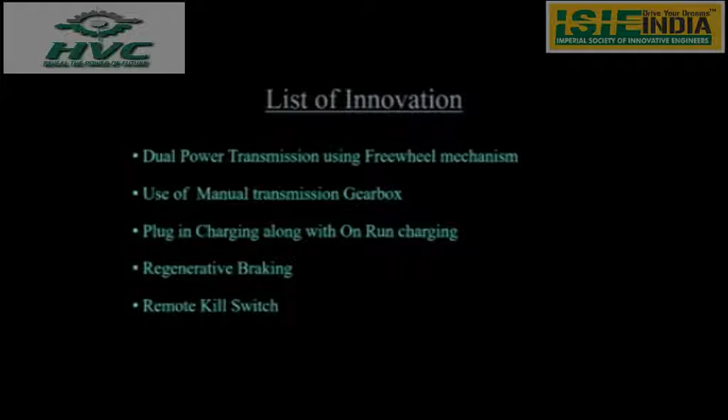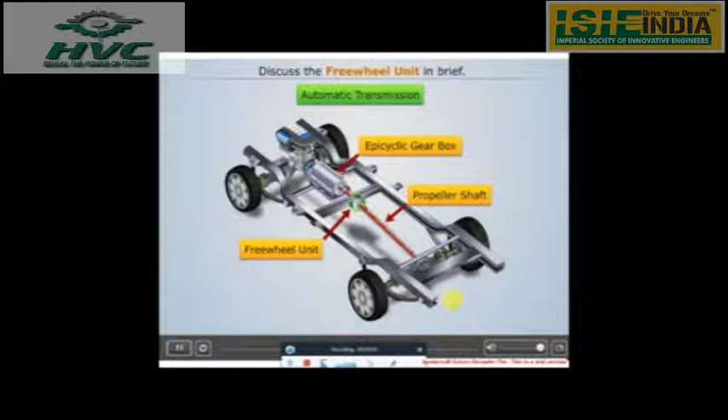In some vehicles, a freewheel unit is provided between the gearbox and the propeller shaft. Let's understand its working and advantages. A typical freewheel unit consists of an inner driving member, which is connected to the gearbox.

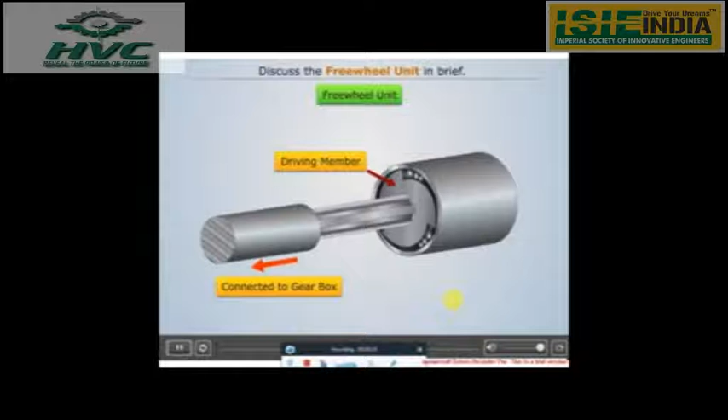The outer driven member is connected to the propeller shaft. The driving member is provided with 3 steps, and in each step, 3 spring-mounted rollers of different sizes are attached.

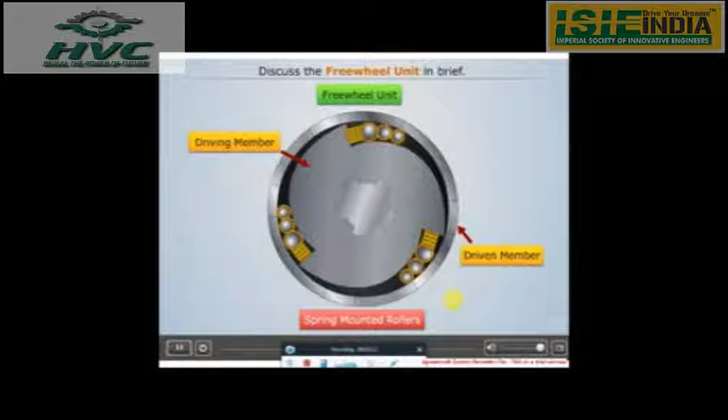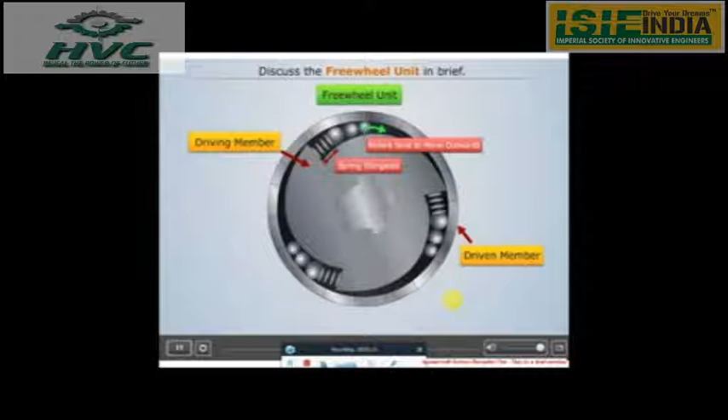When the driving member rotates as shown, the spring elongates and the rollers tend to move outwards. This outward movement of the roller increases the friction between the roller and the driven member. This friction causes the driven member to rotate, and thus the power gets transmitted to the propeller shaft.

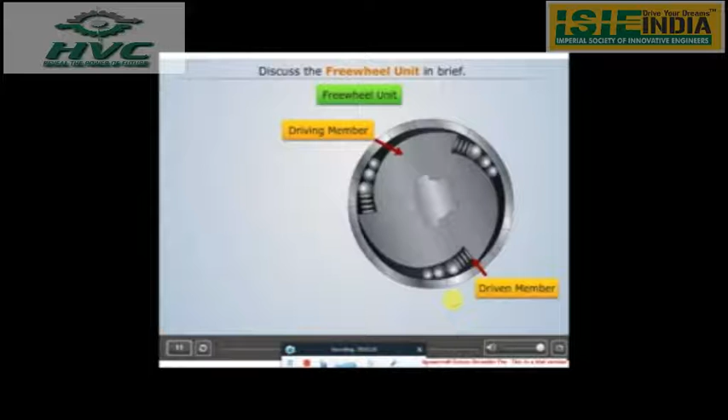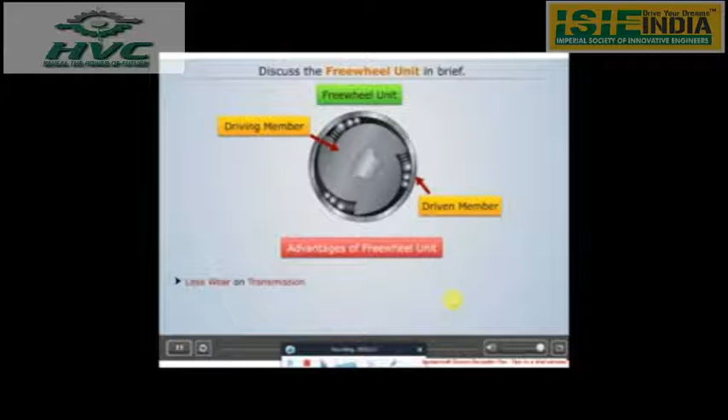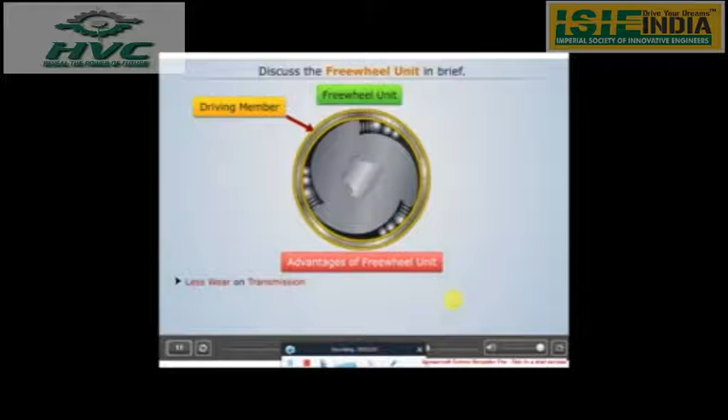The main advantage of the freewheel unit is that it leads to less wear on the transmission while driving down a slope. To understand this, consider a car moving downhill with the clutch engaged. In this case, the outer member becomes the driving member, but this rotating outer member doesn't rotate the inner member with it. Thus, the engine and the transmission get isolated from the driving wheels, which leads to less wear on the transmission.

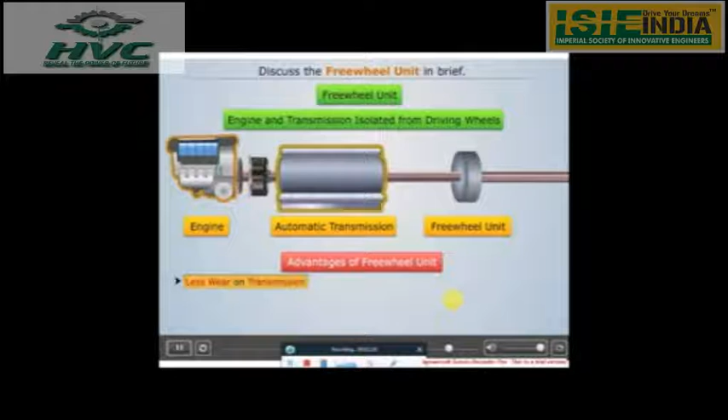Also, the gear need not be brought to neutral. In our vehicle, we used 2 units of freewheel connected in anti-parallel manner. Both freewheel units are connected to a common auxiliary shaft as shown in the figure. Let us describe its working.

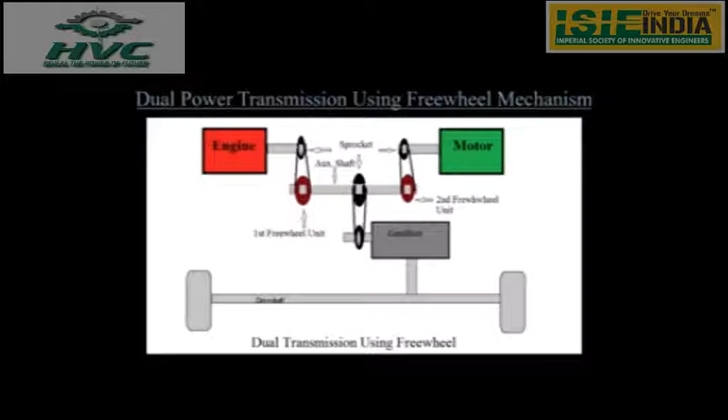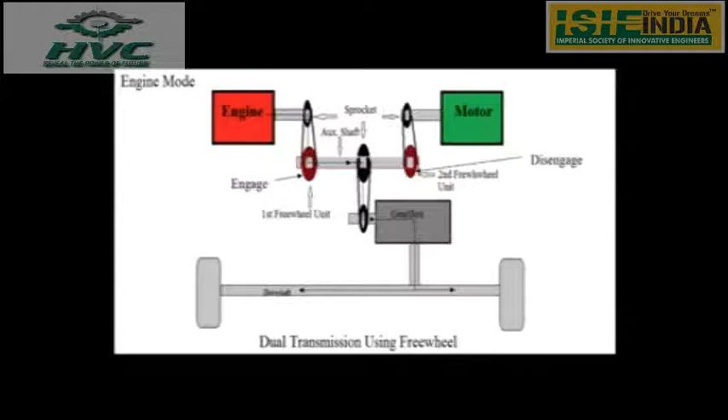In engine mode, when the engine shaft starts rotating, it will rotate the first freewheel unit's upper part, which is connected to the auxiliary shaft. It will then rotate the auxiliary shaft and provide power to the gearbox, which will further transfer to the wheels. In this mode, the second freewheel unit remains disengaged.

In motor mode, when the motor shaft starts rotating, it will rotate the second freewheel unit's upper part, which is connected to the auxiliary shaft. It will then rotate the auxiliary shaft and provide power to the gearbox, which will further transfer to the wheels. In this mode, the first freewheel unit remains disengaged.

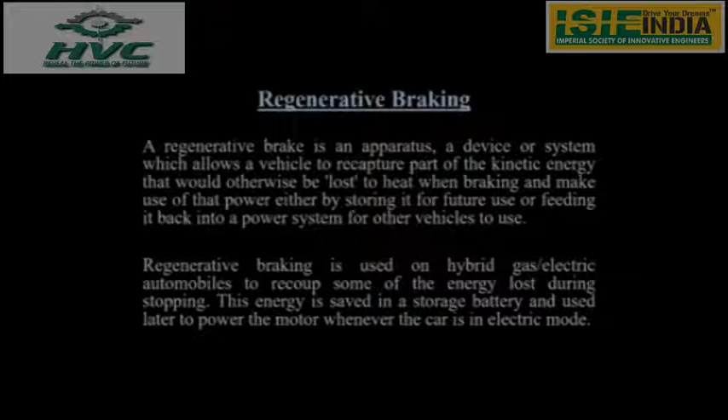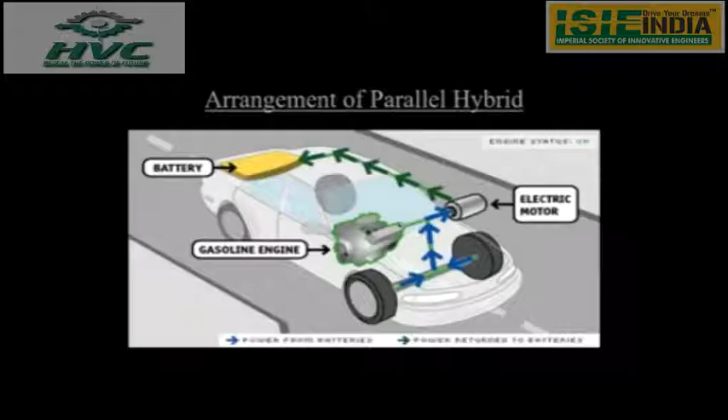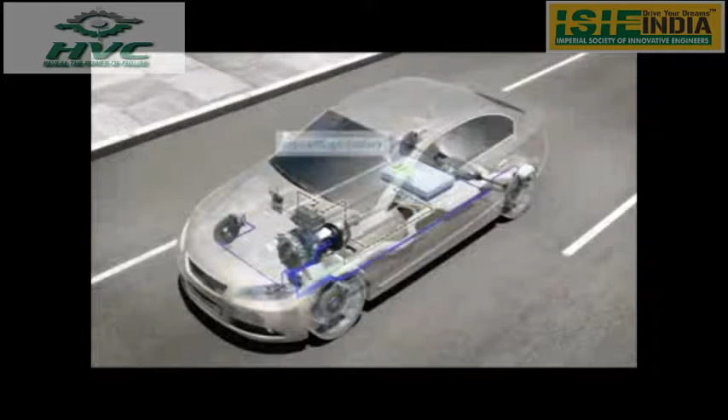When the driver steps on the brake, the vehicle's electric motor switches to generator mode. The wheels transfer kinetic energy via the drivetrain to the generator. Through its rotation, the generator converts a portion of the kinetic energy into electrical energy, which is stored in a high-voltage battery. The generative braking torque of the electric motor, resulting from this energy generation, decelerates the vehicle.

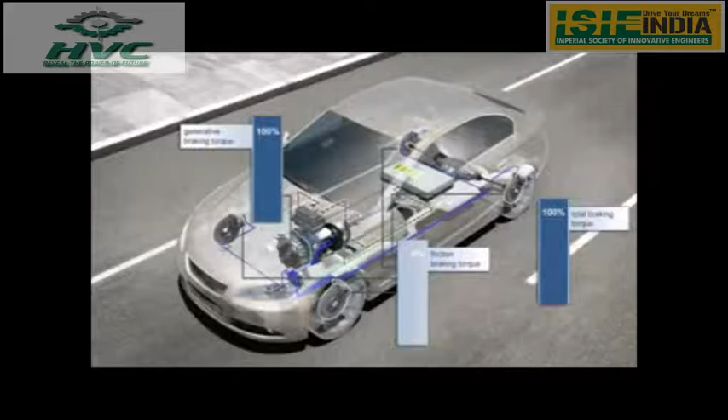At low speeds, for example shortly before the vehicle comes to a stop, the electric motor can no longer supply sufficient generative braking torque, and the friction brake must be activated. To maintain the required deceleration, the braking torque from the friction brake is continuously adapted to the current generative braking torque, a process called torque blending.

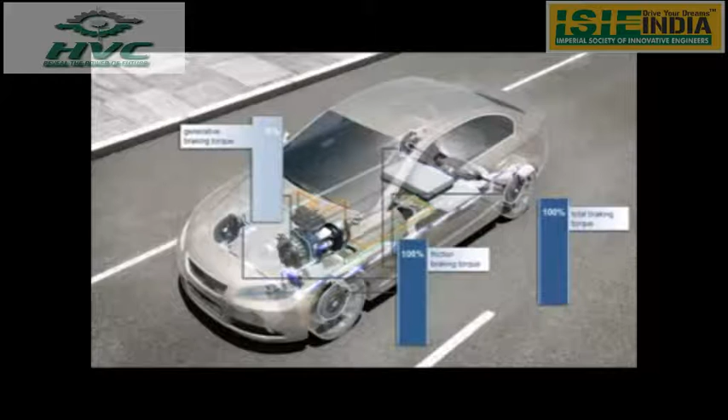In the case of full braking or an unstable driving condition, the vehicle is usually decelerated solely via the friction brake, as wheel-specific interventions are required.

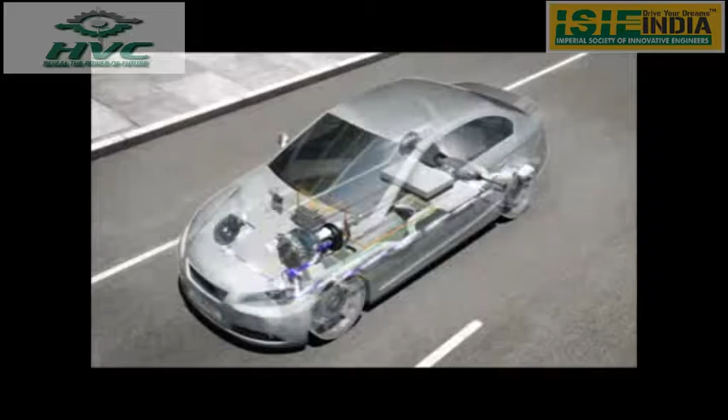Regenerative braking enables an extended range in electric vehicles, as well as lowering fuel consumption and improving CO2 balance in hybrid vehicles.

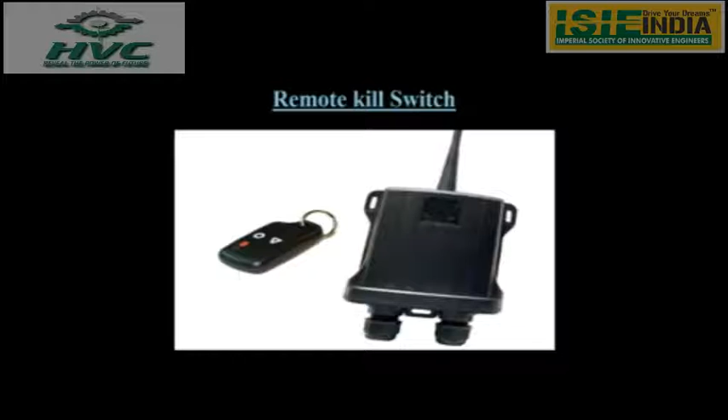With the entire world moving towards wireless technology, this can be used in the automotive world of racing to ensure high-end security to the driver. The wireless trigger of the kill switch would avert any mishap to the driver during an emergency such as loss of control over the vehicle, subsystem failure, or vicinity to an accident.

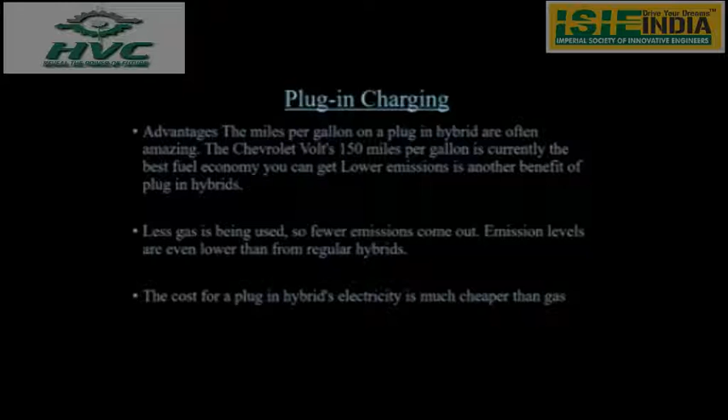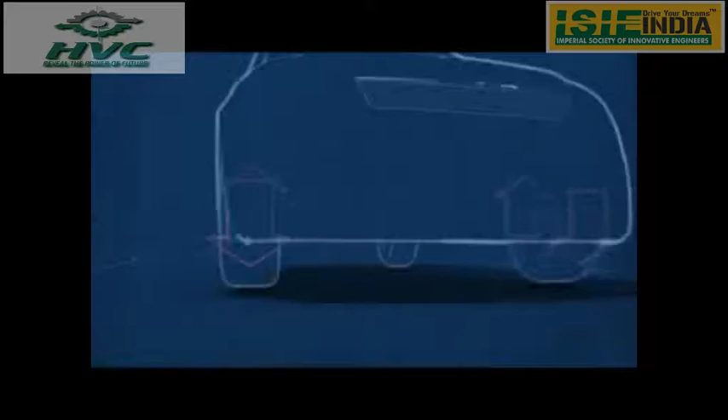Let's talk about plug-in hybrid electric vehicles. These vehicles are relatively new to the roads of Canada, and they are a unique approach by automakers to respond to more stringent greenhouse gas regulations. PHEVs, as they're commonly known, also respond to consumer demands for quieter, cleaner technology when they're behind the wheel.

Quite simply, a plug-in hybrid electric vehicle is essentially a regular hybrid vehicle with a larger battery pack that can be charged by plugging into the grid. The advantage of the plug-in hybrid electric vehicle is that it offers an extended all-electric range capability.

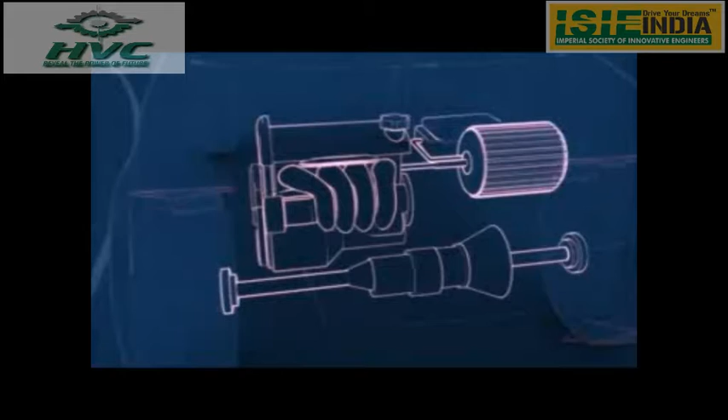Let's get under the hood. There are four main components: first, an internal combustion engine; one or more zero-emission electric motors; and a battery or series of batteries. There are a number of different types and configurations which store and send out electricity, and a transmission that transfers the motor's power to the wheels.

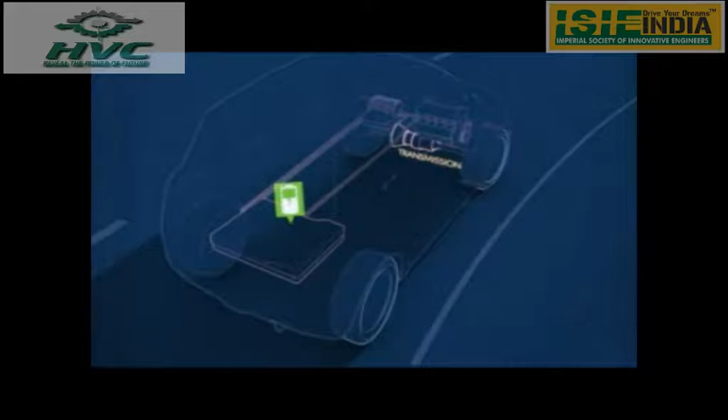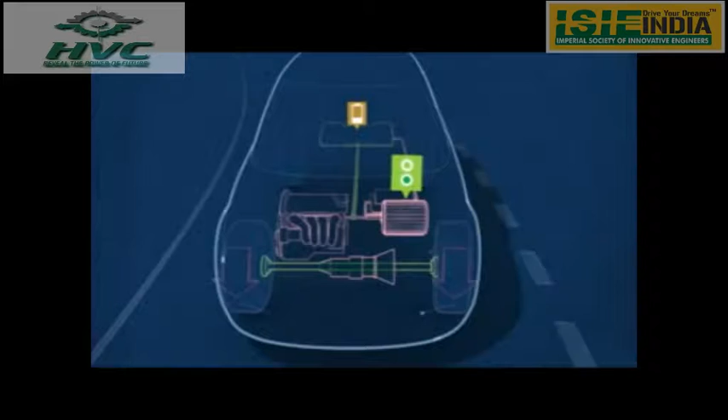While you are driving, a series of computers are constantly monitoring the state of charge of the vehicle's batteries. A plug-in hybrid electric vehicle is designed so that your primary power is electric, so the electric propulsion system is first in line. But when the batteries can no longer provide adequate power, the internal combustion engine is commanded to turn on and take over.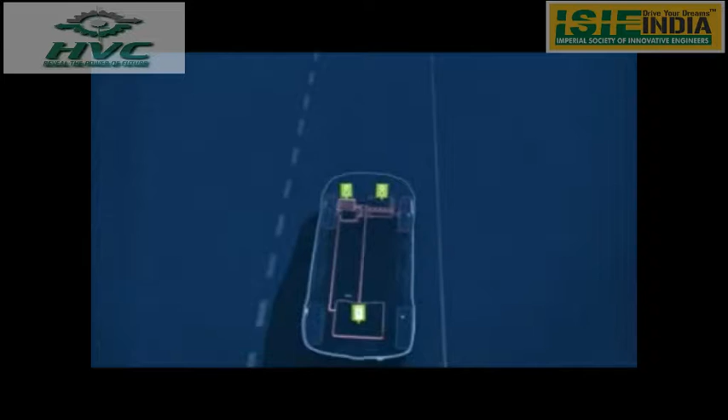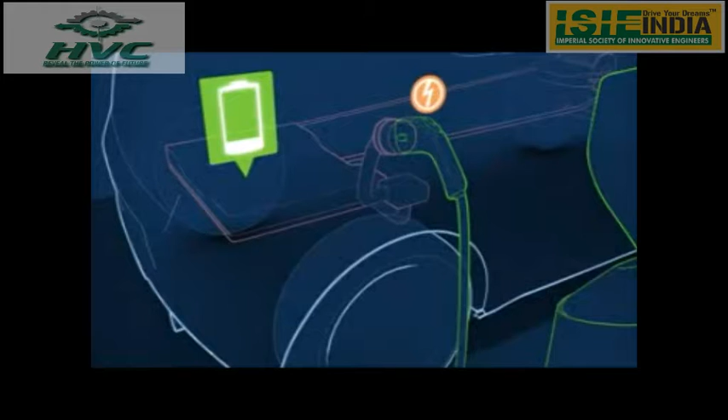For some plug-in hybrid electric vehicles, the internal combustion engine can complement the electric motor when more power is needed. The plug-in hybrid electric vehicle also has a charging coupling, the place you plug into when you are charging the vehicle. That's because the batteries in plug-in hybrid electric vehicles need to be charged in order to ensure that you get the benefit of up to 70 kilometers of electric-only range.

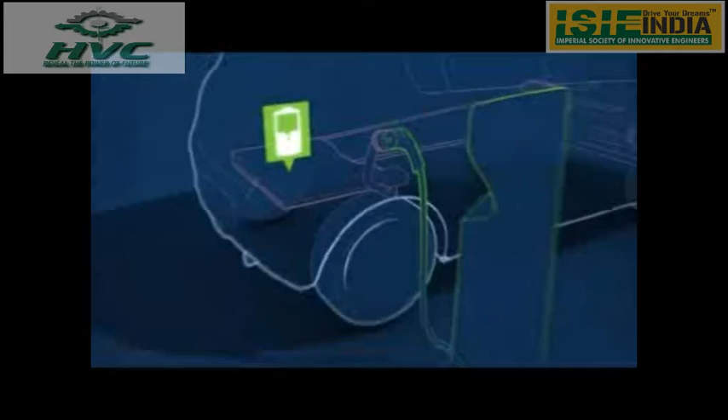If your battery is depleted, you don't have to worry about being stranded, since PHEVs can operate without being plugged in. Most of the time, that means charging from the electrical power grid. People who own or lease plug-in hybrid electric vehicles can charge them up at home. And as these types of vehicles become more popular, public and commercial charging stations will begin to appear that can top up these vehicles while you run your errands.